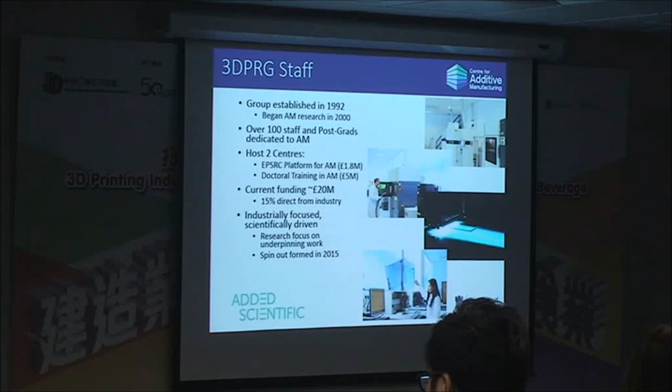So, in terms of who we are, a research group that is around about 100 people, around about 65 PhDs, about 25 postdoctoral researchers, 7 faculty, and some admin and technical staff. And we were established as a rapid prototyping group in 1992 at the University of Nottingham, and then went round various universities in the UK, and ended up back in Nottingham in 2012.

And currently we host two centres of additive manufacturing, which helps underpin our funding. EPSRC is the Engineering and Physical Sciences Research Council in the UK. It's our main science funder for work in universities. And so we host the EPSRC platform grant in additive manufacturing, and I'm also the director of our doctoral training centre in additive manufacturing, where we're training around 70 PhD students in additive manufacturing over a 9-year period, so a large number of students coming through the group.

And we have around about £20 million worth of funding today. About 15 to 20% of that is direct from industry, so we do a lot of direct industry funded research and development. We try to think about research as having a research focus, but it's industrially driven by applications, by understanding what people require from additive manufacturing, and where the science then leads us into good science work.

We also formed a spin-out company in 2015 called Added Scientific, which is a technical service and consultancy company to allow people to understand and to educate themselves and to get the best out of these types of technologies. You can see a few pictures on the right-hand side there of the lab, some of the single material, but also the multi-material systems that we have available.

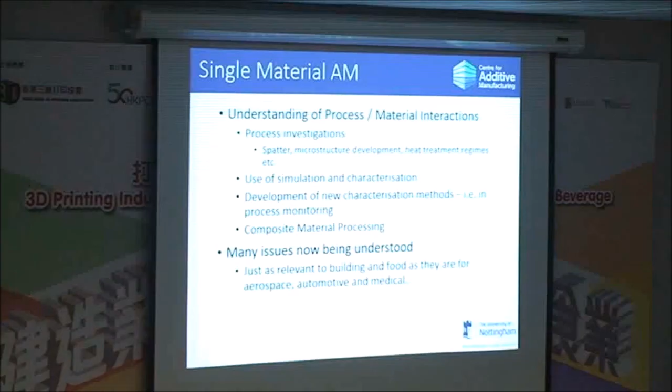So, where we are. Currently, we have a range of technologies that are very useful for fast prototyping, for fast realization of very complex goods and services. We are really at the point where we can pretty much build the geometries that anybody really wants us to be able to do. But there are a lot of secondary factors that are starting to come into play that are really starting to dominate what's happening.

So the example of Boeing using titanium, we heard from Magnus earlier, is a great example, because we've been able to make those structures and make those parts for a long time, for probably about 10 years. But what we haven't been able to do is understand how they differ from those that would be traditionally made. And so a lot of the work that we're seeing at the moment is trying to understand how the processes differ and how the processes affect the components that are coming off those machines.

And so we're seeing a lot of advances in simulation, characterization, microstructural analysis for metals, and composite material processing as well. And we're just starting to uncover a lot of issues that are now starting to be understood. Why microstructure develops, why strength is different, why elongation at break is different.

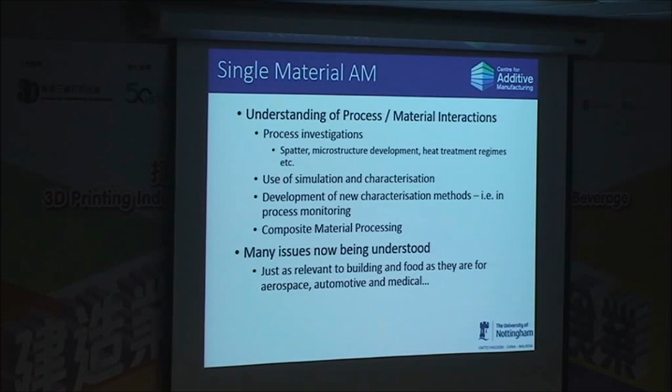And this is just as relevant to the building and food industry, because what goes through the machine is important, but what comes out of the machine is the most important thing. So understanding that material process interaction is critical for the success of any product or any type of application where additive manufacturing or 3D printing is going to be used.

And so what we're able to do now is start to use these tools to understand our processes better, understand what is made, and then reuse that information to make the process better in the final product. So even with the level of porosity you can see, these are 99.9% dense. So they're very dense in comparison to most casting materials that come off conventional processes. But even because of that, because this is a new process with new materials, we're still a little bit nervous about using things that aren't 100% dense, not that we ever get to 100%.

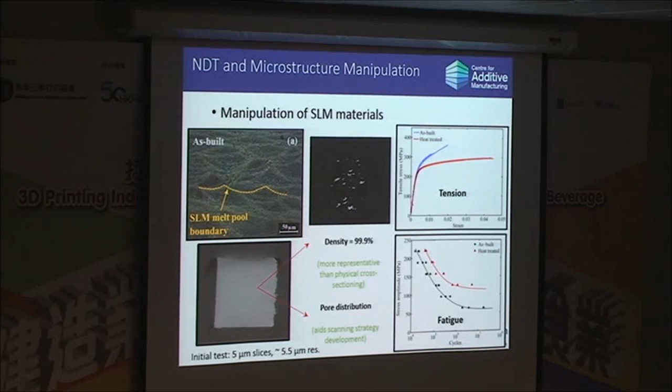One of the reasons for that porosity is that we have different activities going on in the process. And so one of the things that we have when we're processing metals is we have a really nice, very pretty little firework going off as the laser traverses across the bed. So we have this little explosion happening every time we hit the bed with the laser light. But what that means is we create something called laser spatter.

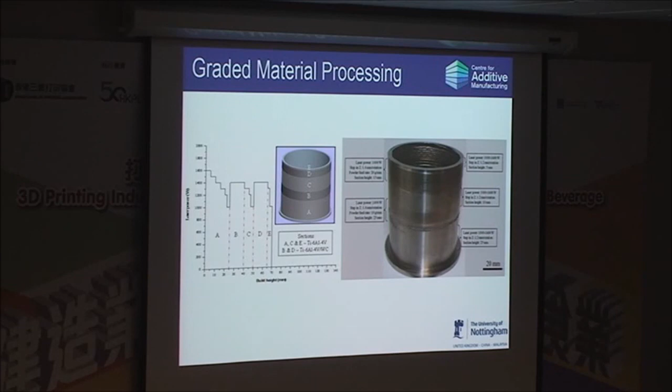And so as I mentioned before, we're starting to develop a lot of methods to look at how components that come off the machines differ to the original design intent, so the original CAD. 3D printing, additive manufacturing is driven by digital data. We need digital data to drive the machines, and if we don't have it, we can't produce anything.

The fact is, though, that digital data is realised in a physical way in the machines. And so what you get out of the machines will be slightly different because of shrinkages, because of thermal stress, because of all sorts of different problems that go on in the machine. It will have a different structure when it comes out of the machine, and understanding that enables us again to go back into the machine, to change what happens in the machine, and to try and make the machine more reliable, more repeatable, and moving further forward, hopefully lower cost because we'll have less waste in the machine.

Another benefit to using additive manufacturing is the fact that we can do something called in-process monitoring. So whereas with almost every other traditional manufacturing technique, you put in your raw material and you get out your final component, you control what goes on in the process. Here, in additive manufacturing, we can see what goes on in the process. Because we build layer by layer, we can take images or we can take optical measurements during the process and really start to understand where things have gone wrong or where things are not quite as they should be in the process.

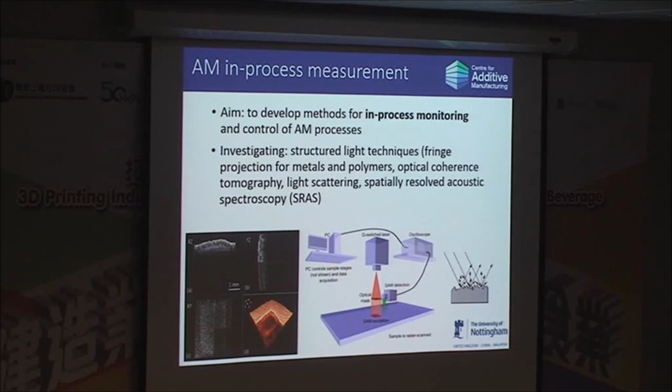So all of this work really leads up to why do we bother with additive manufacturing? Why are we interested in it at all? And we are interested in it at Nottingham because we want to be able to build things like this that are phenomenally complicated, but not complicated for no reason. They're complicated because they're higher performance.

So again, Boeing are doing this because they want lighter weight components on their vehicles or aircraft, and so they use design algorithms such as topology optimization, which is how these have been developed, to really reduce the weight on those components. And additive manufacturing is the only real way of being able to realise the complexity in the component and realise that physically.

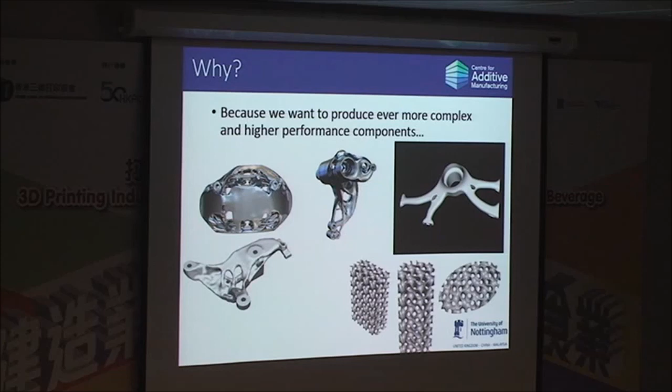Again, you can start to introduce structures that would be impossible to make in a standard manufacturing technique. So these can be used for filtration. I'll talk about these a little bit more later on. Oh, there's more design optimization in the bottom.

So where are we with building and food? So there's been quite a lot of activity in building and food. And these are just some examples. You'll hear a lot better examples, I'm sure, later on. But these are some examples that you can see. This is a metallic structure that is being developed in Holland. It's going to be developed as a bridge over in a park, I believe, and it's a metallic bridge, and this is just a scaled version of that.

All of these processes have the same issues that I was talking about before with the metallic and with the polymer processes that we have for standard additive manufacturing. You need to control the raw material, you need to control the environment that the process is happening in, and you need to ensure the accuracy and repeatability. I don't think any of these really are contentious. For building specifically, atmosphere and the environment are key elements to this.

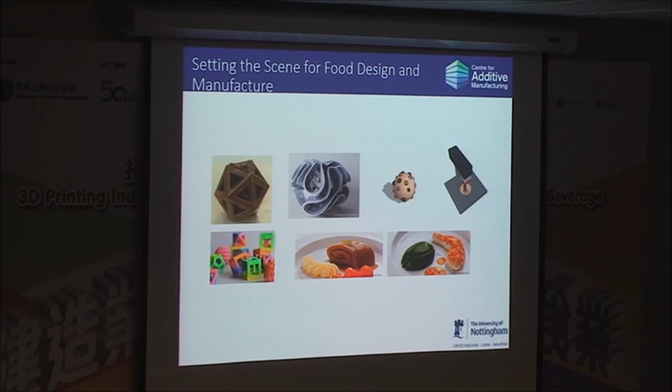In fact, in some ways it gets even worse because we're eating it, so we want to make sure it's not going to do anything badly. Okay, so just to set the scene, these are some examples that I've been able to look at, and most of these examples are based on three manufacturing types.

So these are the seven additive manufacturing categories that are defined by the standards group ASTM F42. So these seven categories are the different types of processes that we have available for additive manufacturing, and most of the food ones, and actually most of the building ones, are actually manufactured using these types of process.

So material extrusion, which is what we commonly know as the consumer 3D printing, powder bed fusion, and the metallic kind of systems, but also sheet lamination, where we're putting a sheet across the bed and then cutting out its shapes and then merging them together, and then actually another one which is binder jetting. We actually do have some work going on binder jetting for food in Nottingham as well, but I'm not going to talk about that today.

So in terms of processes and food specifically, material extrusion is probably the one that dominates the application so far, where we're using a filament of material or a pellet or a paste or a formable liquid to directly squeeze out, like a cake icing type method, to produce our layers in the component, and to then solidify that component together to give us our final shape.

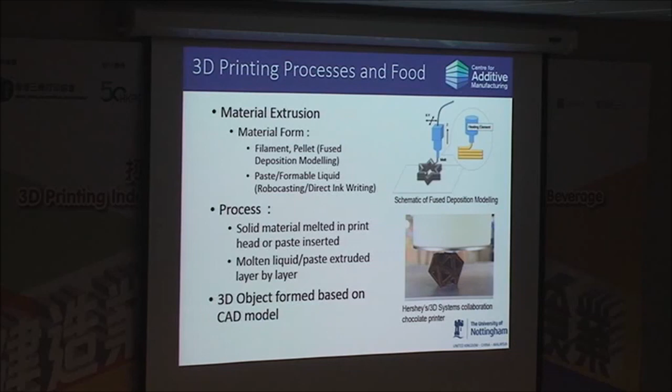One of the things that's really interesting for me in terms of food is normally a foodstuff isn't made from one thing. It's not just chocolate. There'll be some nuts in there, or some caramel, or something tastier, I don't know. Or it might be something that's made from different levels, different types of sugars, or different types of fats, and different types of proteins.

And so here you can see some further examples by Cornell. Again, by using paste-based methods, some gummy sweets, which we'll hear about again later on, but also pasta. Pasta that's been done by a company called Barilla and the research organisation TNO in Holland.

So all of these elements require significant control, significant challenges in being able to put the right material in the right place at the right time to give you the right performance, regardless of whether it's building food, whether it's rocket engines for spacecraft. It's all about controlling where and when the materials are put down.

This is another example. So this is binder jetting. So here what we're doing is we're printing into a powdered material, in this case sugar. So we're printing into sugar different colours, but also with a binder that's edible. So you can produce lots of different shapes and sizes and different designs and all sorts of different things.

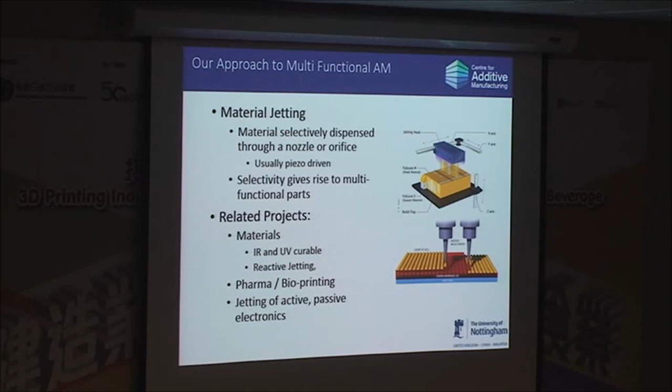So the interesting thing to understand about inkjet printing is most things can't be printed. They're too thick, their viscosity is too high. And so what we have to do is lots of work in the material space to reduce that viscosity down to a point where the material can flow through a head and be ejected from the nozzle.

So here you can see some examples here of wax that's been printed. There's wax that goes into the head, is melted up to its melt point, and the viscosity drops down, and we're able to print out droplets of this. And what we're looking at is lots of materials and chemistry challenges.

Before we get to that stage, we need to be able to design for these structures. So at Nottingham, we've also been developing the design side as well as the process and materials side. And these very complicated structures that you can see below, we can quite easily produce using some design software that we are developing as part of an Innovate UK funded project.

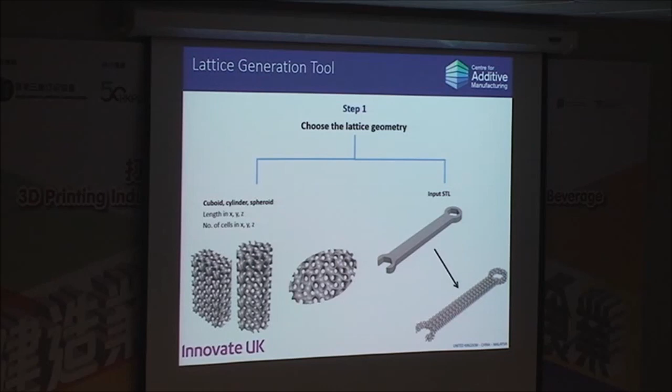Where we can choose from a range of different cell types. So from this double gyroid all the way down to, no idea what this is, lidinoid or whatever it is. But these are all something called triply periodic minimal surface structures. So again, that's the one for the test later.

These structures are surfaces that interweave, and they're very interesting because they can separate space, they can have very low volume, but also you can run different fluids through different elements of it, all sorts of different things. And our software basically enables you to choose one of these, or two of these, or three of these, and populate your design space with them pretty easily.

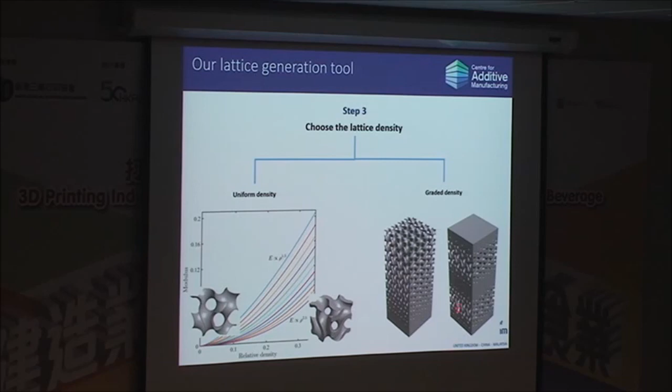And so here you can see changing density to change the modulus, to change the mechanical properties, but also we can grade that density through a component from fully solid to a given density measure. Or we can do that in a varied kind of way, so we can do this in a sinusoidal way as well.

A different way of going about this design is to understand what the competing design constraints are that you have in your product. So for this example, this is a structural analysis that's lightweighting a component, but it also has an electrical conduit which has a minimum distance profile embedded in it. And so what it's trying to do is compete with the lowest lightweight structure for the structural, but also the shortest distance for this electrical conduit that's in there as well.

And so we have this system again at Nottingham where we're able to do multiple objective optimization to really start to expand the design space for any kind of application. It may be that you don't want electronics to be optimized, but you maybe want thermal analysis to be optimized, or it might be placement of different materials to give a different flavor profile through an optimized component, or an optimized product rather.

And you end up with things that look like this. So this is something that our students designed about 4 years ago, where you can see that the dark elements are the electronics and the see-through are the structural. And this is the kind of thing that we'd like to be able to produce, but we just can't. This is printed in basically black and clear plastic at the moment. So if these were electronics, then we'd be really happy, but they're not. So that's what I'm moving into now.

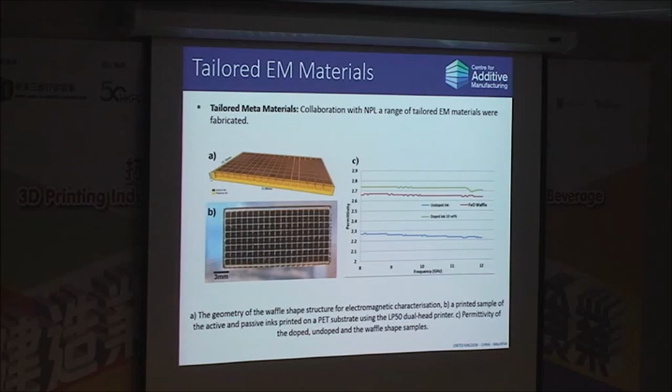So with this inkjet printing type method, we're able to print a wide range of different materials, and so what we can start to do is tailor how these materials are delivered to the component. Here you can see this waffle structure, we call it a waffle structure, which has a structural material, and then the black areas are silver. And you might ask why you want to do this.

Well, this is actually a very useful method of tailoring the electromagnetic properties of a component. So this is using this kind of technique to change the relative permittivity of the component, which is really interesting in terms of metamaterials, for antenna, for electronic screening and shielding. You can do all sorts of different applications with this kind of technology.

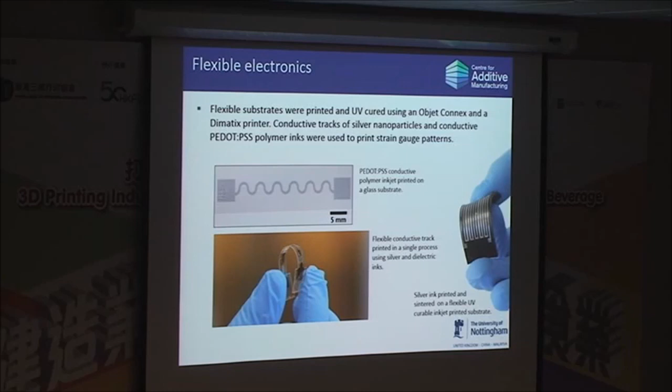You can also start to build sensors into your components. So this is an electroactive polymer printed into another polymer, and then silver printed into another polymer that's flexible. So you can start building flexible sensors that might be required for structural monitoring of your components, or structural monitoring of your buildings, or something like that. That you can then print into structures as you're going through, or add them on later, because they're the right shape, the right conformity to the particular pattern that you're interested in.

And this example just really shows you how we move from 2 dimensions. Printing electronics in 2 dimensions is actually quite simple, relatively. The materials are not necessarily the greatest performance, but it's quite simple to do. And so you're able to print these 2-dimensional structures and then add in components like batteries and switches and LEDs. But what we really want to be able to do is print in this 3rd dimension. And that's much more difficult.

But printing in this vertical direction is much more difficult. So we've spent about 3 years being able to build up with metals in a printing type system. And here you can see about 5,000 layers of silver in the vertical direction, which is able to take a current. And actually we now have different ways of printing these so that it takes less time. This would have taken overnight to print that high, which is only about 3 millimeters, so it takes a long time. But we're now able to do this a lot faster than we were before.

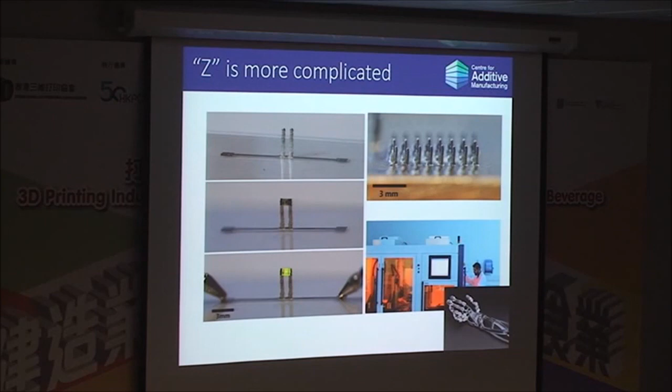And we're also able to change how the microstructure of the material really develops by doing in-process methods that enable us to get to this nice continuous structure. Obviously this is really bad for electronics because the electrons won't go in that vertical direction, they get stuck at the boundaries.

Taking that further forward, what we can do is start to build transistors. So we've seen quite simple circuits, but now we're moving towards being able to print transistors that then have the effect of being able to print switches within a circuit. And so we're moving towards being able to print these transistors into a component, and so then you can effectively have logic gates and hopefully one day a printed sort of microchip design. And you can spatially move those components throughout the system to understand where you need them, where you don't need them, and get the right, more optimum design.

Finally, in this kind of electronics area, what we're able to do is print the circuits, we can print some of the components, so we can print batteries, we can print resistors really easily, we can print transistors relatively easily, but what we're also able to do now is print light.

So that's taken 5-6 years to get to that point in terms of research. But obviously, working in the university, we try and do as many different things as we can. And so this is just an interesting sideline to the electroactive printing that we're interested in being able to do.

So instead of those inks that you saw that took overnight to print a few millimeters in height, they're made from a nanoparticle suspension in a material. What we'd really like to be able to do is actually just print the metal. And we can do that with powder bed systems. If you want to be able to print multiple materials, they don't work, because you can't spatially print in different materials very easily. So we have a process at Nottingham called MetalJet.

And basically this is the same kind of process as inkjet printing, but we're actually printing metal direct from melt. And so we have a collaboration with Canon Océ where we're printing three-dimensional structures using a print head that runs at around about 1800 degrees C to deposit metals directly.

And here you can see, one day, maybe, try it again in a second. You can see in this video, if it works, oh, there we go.

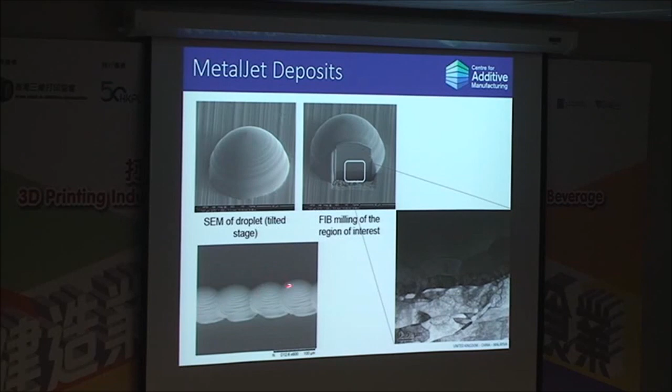Another area which is actually very close to the food area is, because we're wanting to print different materials next to each other, why don't we look at printing, rather than electroactive materials, biological structures and pharmaceutical structures? So one of the reasons why we do this is for drug delivery. And we have some projects that are ongoing that are looking at printing basically tablets. But not tablets of ibuprofen or paracetamol that you would normally buy in the chemist or the pharmacist.

Actually being able to print very high value drugs that have customized elements to them for the individual patient. So rather than giving everybody the same dose via the same pill, you're able to change the dose for each individual patient, but only really for very high value drugs like cancer drugs, HIV and things like that. It limits the cost of those tablets, but also increases how effective they are for the individual patients.

So just going even further down the resolution scale, this is some... I'll sort this out. There we go. So this is some work we're doing with nanoscale additive manufacturing. So really pushing the envelope in terms of the smallest thing we can manufacture.

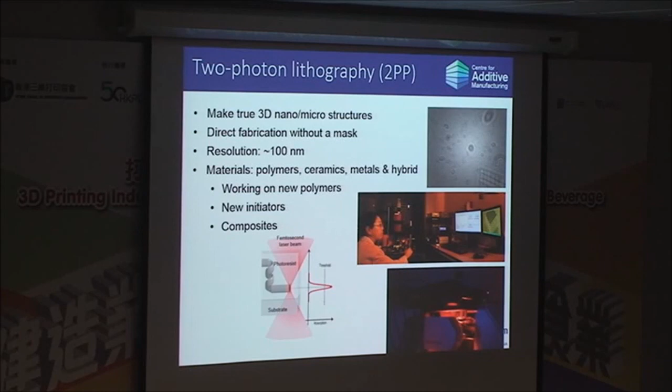Instead of using UV, it uses infrared light to develop the structures. And here are some structures you can see that are printed on that system. So if you look at the scale bar, these are around about a micron in size. So these grids and structures that we can print are really interesting, particularly if you can start to fill in these gaps with something else. So you can start to add in different materials by adding in different coatings to be able to produce really different types of products and structures.

The problem with this process is that you can't build very big things. You can be kind of that big, so a few millimeters in size. But it is relatively scalable. There is a scalability potential with it. And also, we don't have to just build one component, one material component. We can do multiple material components.

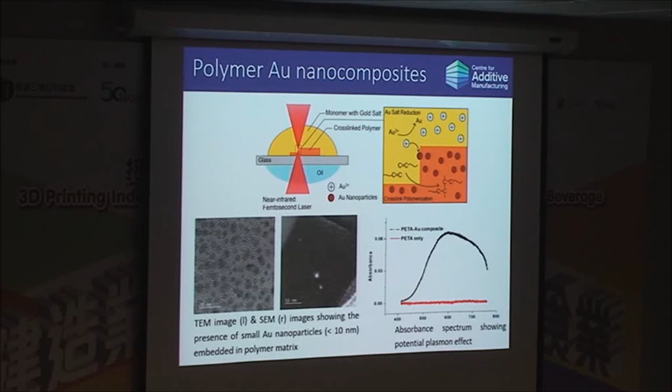So we can start to print metallic components into these nanoscale structures that really give us different metamaterial type properties. And these are polymer structures that have gold embedded in them. So these can act as sensors and act as different biological structures that we can use for scaffolds and all sorts of different things.

So lastly, in terms of the 2-photon, this is again pretty much bespoke to Nottingham: we have this 2-photon lithography method, but we also have something called a set of optical tweezers. So optical tweezers are like Star Trek tractor beams, but only on a very small scale. So they don't pull in spaceships; they pull in little balls of whatever material it is. So this optical trap picks up this individual particle and can move it in 3 dimensions with light. So that's how it works.

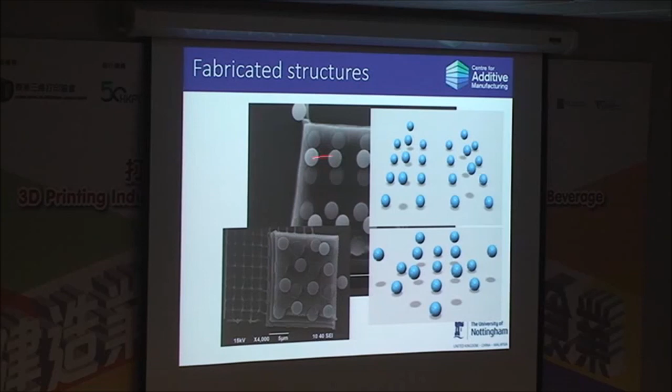And what we've done is been able to couple that with our 2-photon lithography system to glue it in place. So we can start to glue in different particles of different materials into one place and start to be able to make these really complex structures with these additional elements in them. This may work, this may not. Give it a try. Yeah, there we go.

So the blue dots are actually the dots that we've pulled in with our optical tweezers, and then there we go. Excuse me. And then we've set them in place with the 2-photon. So what we're really starting to do is build from almost a nanometer scale, build materials up so that they have particular types of properties, or particular types of process characteristics.

So just to start to summarise, how do all of these previous methods really affect building and food applications? Well, all buildings are inherently multifunctional. This is an example of homeostasis for intelligent buildings. And what hopefully you've been able to see is all of these different methods, whether they be single material or multi-material, can start to be incorporated at different length scales.

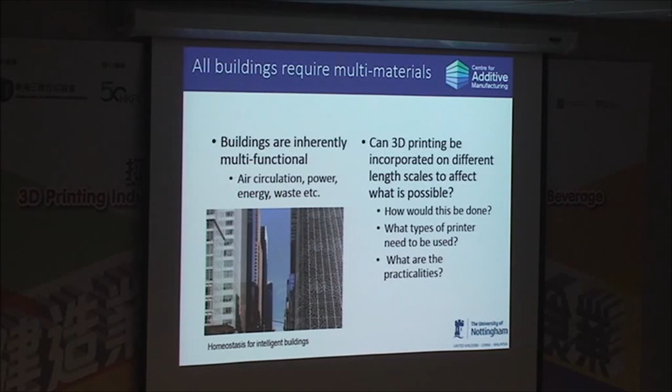But what we don't really understand, and maybe understand later after today, is how these can be really implemented into the system, particularly with buildings, because you have such huge scales in comparison to additive manufacturing processes today. What are the real practical challenges of being able to do this in terms of getting those multifunctional, multi-material structures in there? And the same with food.

We have multiple ingredients, we have multiple components that have to be incorporated in the right way, with the right process conditions to make the material as functional, i.e. have the right taste or right structure or the right feel, as possible. We have the potential to distribute taste, we have the potential to distribute things like folic acid for fortification, or even something called nutraceuticals, where we're actually able to print clinical benefits into food for people who are maybe elderly or for pediatric medicine, to make it more palatable to take that type of medicine.

So really, in terms of summary and conclusions, there's a lot of different opportunities for materials development, for materials qualification. There's a lot of understanding now being developed to be able to start the material process design and to manipulate material response for a given application. We are now starting to see lots of material-specific research becoming more common, and new methods of depositing materials are really quite key to developing that multifunctional side of things.

The multifunctional, multi-material distribution type processes are much more challenging than the single material, because we have to look at how the materials sit together, how they react, how they merge, and really what are the different methods of depositing, different methods of post-processing and consolidating those materials. Really, really important. And really the opportunity is to understand what happens at the interface of the different applications, but also what happens at the interface of the different materials that are being printed together.

My last question. You mentioned a special material at 1800 degrees. In that environment, everything will be melted around the printer head, so you can't use plastic or copper wire. Yeah. So we're looking into printing onto ceramic-filled plastics and ceramic materials as a dielectric layer, but also using polyimide as a print base. Another issue, as well as temperature, is adhesion to the surface, whether we get adhesion at those temperatures, and how much degradation happens.

Hello, Chris. A similar question: may I know the lifespan of the nozzle jet? On our large format printer, I think we're running at 2 years at the moment. But again, we keep the same material. You can flush the heads, and you can repair them a little as well. They don't tend to go down very quickly unless we're doing something very aggressive in the head.

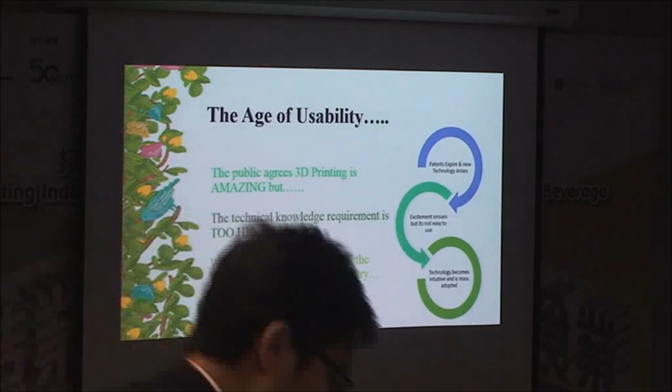the consumer. And that is the challenge right now with 3D printing, unless you have a degree in it, or CAD design, or a massive level of enthusiasm, which there are those people, but they're not the mainstream market. So whoever takes this problem on across all different kinds of 3D printing, food, FDM, PLA printing, home use, creating tools at home, whoever makes it easy for the design and printing process to be perfect every time, and whoever can speed it up to increase usability, they will own that part of the sector and industry for the future, in my opinion.

So how was Magic born? That's Mr. Facine, that's me, and that's Mr. Adine. These are my development team. Mr. Adine helped us develop our ingredients. I came up with the software and the hardware, and Mr. Facine has a huge amount of industry expertise in confectionery, and he was helpful with that. So basically, what did I do? I developed the first prototype printer.

I actually used a shell of a glue deposition machine, if you can believe this, that was being used to apply glue for cars, like double mixture, high intensity epoxy glue. So I used a shell of that, implemented a special extruder base, and launched this into the market in Berlin in the summer of 2015 in order to test, what is the consumer reaction? Are people ready for 3D printed food? Are they going to be freaked out by it? Is it too scientific? How can we make it so that it's really enjoyable and really well accepted by them?

So I moved to Berlin, and I actually worked as a retail associate or a shop worker in this store for 3 months, and I watched the faces of every consumer. I watched the way that they reacted to every single different thing that we tried during that 3-month period, and I learned a ton. The first prototype that I developed was slow, it was still faster than Hershey's, but it's a lot slower than we have now. It took about 10 minutes to make one design. Our candies now print in under 5 minutes, no matter what you design, so it is one of the fastest in the world. But watching people, it made it very clear that 10 minutes in a busy retail environment was too slow. But more than that, the biggest issue that we had was the usability.

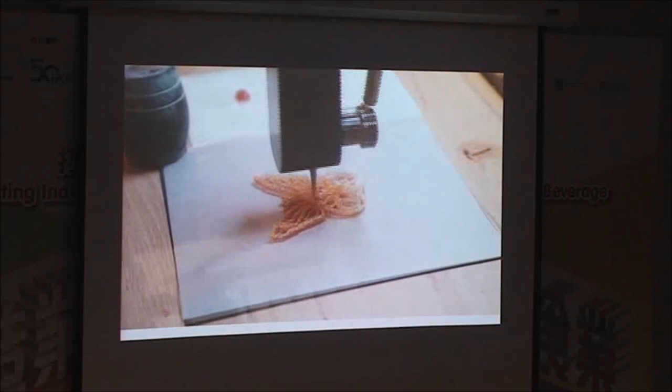That, along with the fact that all products from the Magic Candy Factory are vegan, dairy-free, gluten-free, and all natural, means that everyone from all walks of life can enjoy the experience we have here. Okay. It goes on to show you a little bit more, but it's not that important.

So yeah, you will have seen in that video, the machine was huge. Did you see it? The thing covered in wood? We coated our printer in wood to make it seem more natural as opposed to being like food made in a lab. And that actually has been really well received by the customer. So our printers still are focused around the idea of natural magic as opposed to high-level science.

And this is not super easy to do, and this is one of the big problems with food printing. People who are using 3D food printers in a lab or at expos don't have to abide by any of those rules, so they can create really cool looking stuff, but whether they'd be able to actually sell it to someone in an actual retail environment is a different story altogether. Powder bed printing has a lot of problems with chemical transference, etc., which make it very difficult to pass. So that's the first step.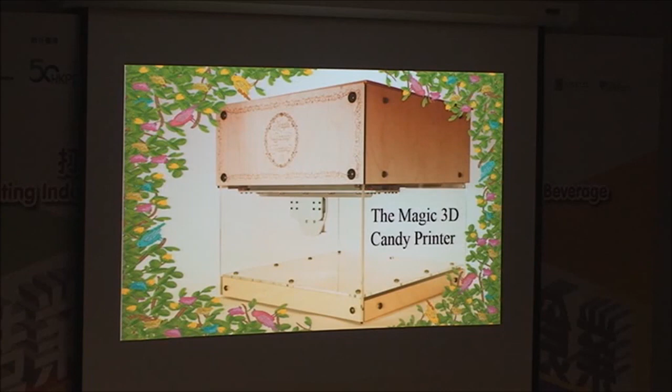They type in their design, they draw their picture, they press a button, and like magic, the candy prints out in 5 minutes. Now, we all know there's a ton of science and technology happening in the background, but the consumer doesn't really care about that. All they care about is, this is a magical device that allows me to make something special and unique for me every time.

And then these are Gummy Zummies, because the word cartridge is not a food word, and we do not say cartridge in food. Or syringe, that's even worse. So we have a trademark name, Gummy Zummy, and inside of these cartridges, these are pre-filled. They each have their own nozzle. They're made of totally recyclable PET plastic, and they come fully wrapped and ready to go.

You place one in the machine for each individual print. You push one button, it prints it out, you take it out, you recycle it, ta-da. And that works perfectly every time. And by controlling the material, the amount, the heating, and the actual plastic that we use, which encourages very fast homogeneous heating, we're able to ensure that the result for the customer is perfect every time.

And then we have finishing sprays. This is more retail magic than it has anything to do with 3D printing, but every candy can become fizzy strawberry, sour strawberry, or glitter strawberry, etc. And you'll see those over there when you're done. All of the products that we make are completely safe for almost anyone to eat. They're GMO free, they're vegan, they're free from gluten, dairy, soy, eggs, peanuts, tree nuts, caseins, and wheat. And they're halal and kosher friendly.

And that means that it's really, I believe, the future of food to be able to create things that are inclusive, not exclusive. And by traveling around the world and seeing all of the different trends in different types of food allergies, and even though maybe people are not allergic to it, it's a trend to be gluten-free, for whatever reason, it doesn't really matter. The consumer decides what we make, and now we don't actually exclude anyone from our product set, which I think is the future of food in general, or should be.

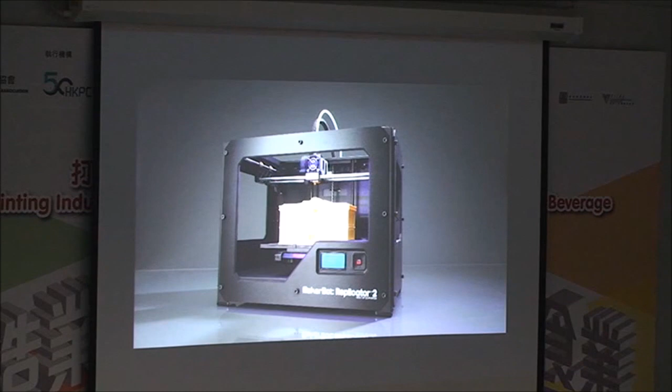I'm going to talk about our innovations which consider 3D printing architecture for the 21st century. We have several ethos, one being that we often look at traditional construction practices as the way to move forward, particularly looking at smaller building components. So rather than thinking of one large machine that prints one material as a solution for architecture, we believe that architecture is comprised of many different kinds of materials: hard materials, soft materials, woods, cements.

We also believe that building materials should come from sustainable and renewable resources, or should use building materials in sustainable ways. So I'm going to talk to you about some of those as well. As I mentioned, we began with the most common building element, the brick. And we've explored the way that very accessible technologies can allow for scaling up in terms of architecture. And we've begun to explore several experiments that look at ways that additive manufacturing can enter the building industry.

So we begin with a single brick. How can we introduce complexity and craft into a system to create 3D printed walls, for example? Walls that use one single brick that can be rotated randomly and be assembled very simply, entirely with 3D printable components, and create a complexity that uses the material, the materialities, translucency, various colors to produce customizable architecture.

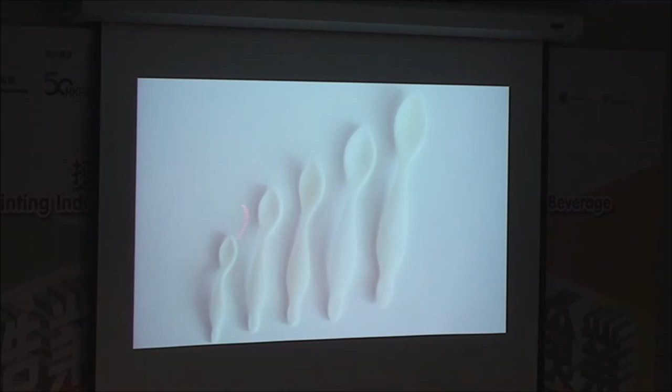The 3D printed spoons you see are teaspoons. And so we make teaspoons out of sugar that are the volume of a teaspoon, half a teaspoon, a quarter teaspoon, a teaspoon and a half. And so these are our sugar teaspoons. But it doesn't make sense to print teaspoons out of sugar, so we printed teaspoons out of tea. These are our 3D printed teaspoons that are printed out of tea that are the volume of a teaspoon.

And of course, if we have teaspoons, we also need teacups. These are our material innovations that explore tea as an additive manufacturing material to make 3D printed teacups. And if you have teaspoons and you have teacups, then of course you'll have a tea set and you need a teapot. And so we decided to 3D print a teapot as well, but what teapot did we choose? I don't know if you're familiar with this teapot, but this is called the Newell teapot. And this was the first object that ever was translated and rendered on a computer back at the University of Utah.

And so the Newell teapot was taken into the computer many decades ago, and now we've brought that back into the physical world. This is the Newell teapot, 3D printed out of tea. And of course, this is what we call the Newell tea set.

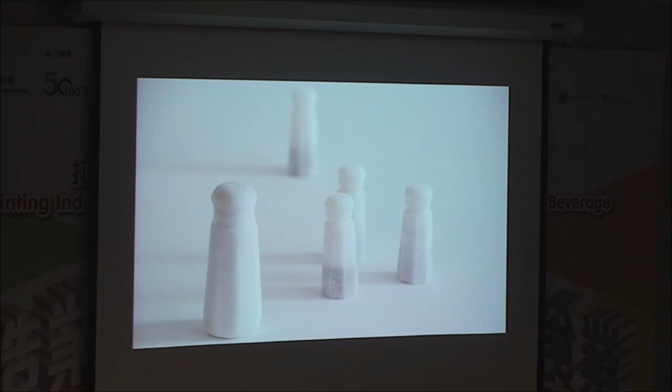Looking around the table even more, we were interested in the salt as a potentially additively manufactured material. So we 3D printed some salt shakers, but that in fact wasn't very exciting or very useful. But we were much more excited about the idea that in the San Francisco Bay Area, there are several hundreds, thousands of tons of salt produced each year in these crystallization ponds, which makes salt a very available and local material, makes it very inexpensive, and only wind and sun is used to produce the salt.

So if you ever fly into San Francisco, you'll see these beautiful ponds that are multicolored, often pink, and those are the crystallization ponds where they bring in water from the San Francisco Bay, and they lock it in, and they let it dry over the course of the year, and it produces about 4 inches of salt each year.

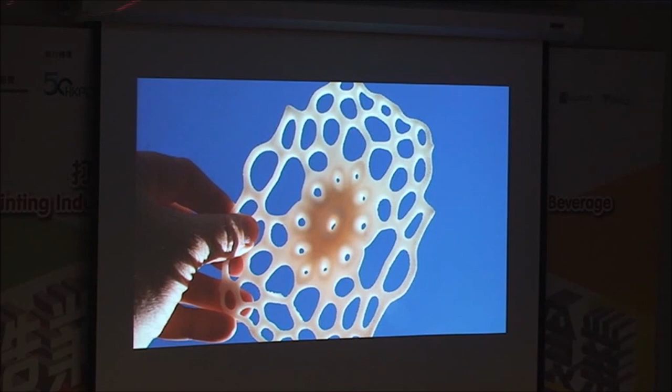So we began to explore how salt can become a material for additive manufacturing, and these are some of our experiments looking at micronized salt from that landscape as a building material that can be assembled into components. We developed a polymer that can seal the salt, making it waterproof and giving it structural qualities. So we began to aggregate salt into components to think about how we might produce larger structures made out of 3D printed salt.

The company that owns the land in the San Francisco Bay has been slowly selling the land to produce housing, and they're currently planning on constructing over 40,000 houses in this landscape. So as a theoretical and conceptual exercise, we wondered, well, could salt be part of the building palette that would produce that architecture? So we took it upon ourselves to produce an experiment that explored salt as a building material.

We were inspired by the Inuit igloo because the Inuit igloo uses the material from the landscape to build the architecture itself. And so we made a Saltygloo because it was made out of salt and glue. And if you're a Spanish speaker, you know that y means and. Thanks.

So we began to design the Saltygloo looking at the forms of the traditional salt extraction practices and also the microscopic crystallization forms of salt. And this is a single brick. So whereas the Star Lounge was an experiment really in file management, this became an experiment not only in materiality, but how we could produce a structure very quickly. Fundamentally, a lightweight salt tent.

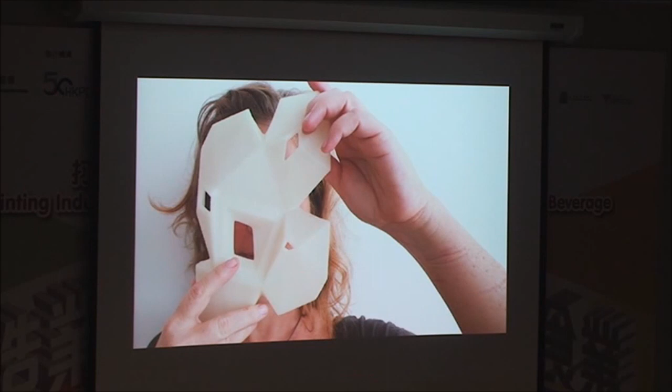And so we took this form and we aggregated along the surface. Here are the salt components. Each one of the 340 salt blocks are unique. And here they are assembled together to create a lightweight shell. The shell is structural, but it's also assisted by very lightweight rods held in tension. So it's really like a salt tent.

And here is the salt igloo in our lab being constructed. Here's the interior of the Saltygloo. You can see they're held together with these lightweight rods and very small clips, so it can be rapidly deployed, so it can be assembled and disassembled very quickly. And here's another view of it.

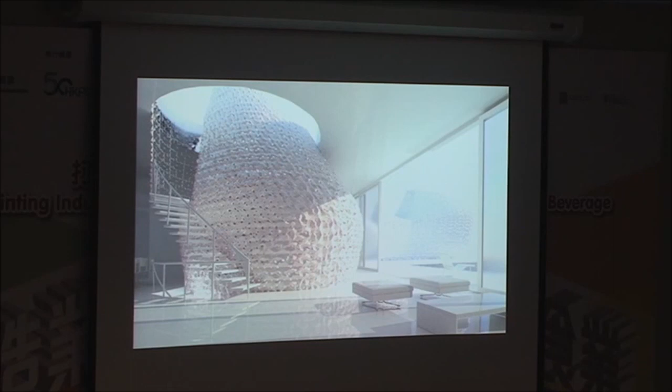This was a prototype that was funded by a company in Beijing who wanted to create 3D printed houses north of Beijing. So we're imagining these as prototypes for architecture. We're imagining these, in this case for this house in Beijing, as ways to enclose the interior private elements of the house, bedrooms and bathrooms, for example. But because we also have been able to create these as waterproof structures, we're imagining exterior components as well being clad, so building facades, for example.

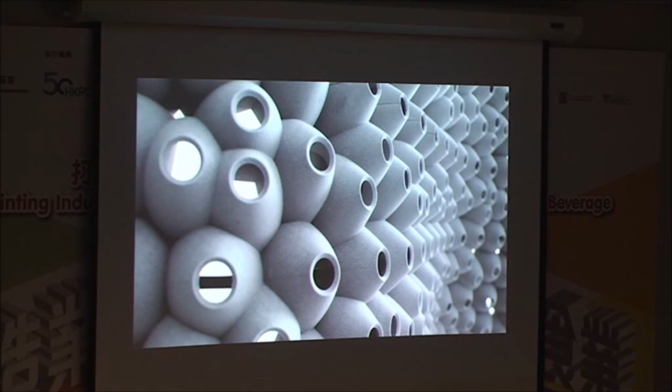And we've explored other materials in the house, particularly for the facade, that begin to take the advantages of 3D printing to define views, to allow light into spaces in particular ways, and to define privacy using a material that we've been exploring for additive manufacturing, which is sand. Sand, of course, is readily available, and it can uniquely be used as an additively manufactured material. So we developed a series of blocks that could be stacked and hung as a building facade. They too are waterproof and have structural qualities, and this is what we call the Picoroco block.

It'll also be used for sound attenuation, and because it's quite dense and quite massive, it's very much like stone. And so in another project, we began to explore how this material could potentially be used as a structural material. And being inspired by Inca ashlar masonry, how could we create a series of interlocking blocks that worked to resist seismic forces? And this is a project that we call the quake column.

So you may be familiar with Inca ashlar masonry, which is very complexly cut to interlock together, and when there's an earthquake, it has the ability to disperse the seismic waves. And so we decided to take that into consideration to make a 3D printed block that could interlock very tightly with its neighbors, and that could be assembled very easily because instructions could be encoded in each block. And also it was very manageable because although each of these blocks are quite heavy, they had a handle 3D printed into the block itself, making them easy to carry.

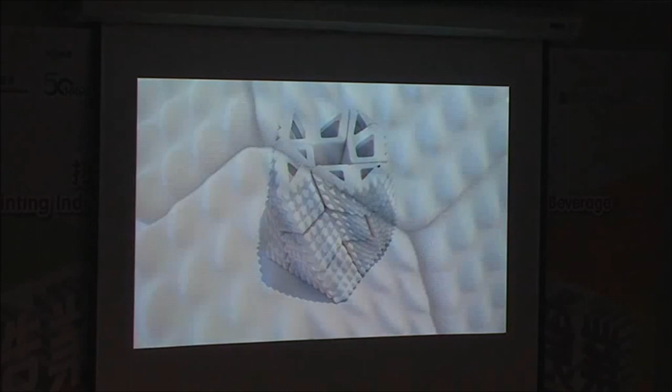So here you see the precision of each block as it's interlocked with their neighbor. Here's the assembly, you see the instructions, so a workman knows exactly where they go in space. And this is the 3D printed quake column.

Other materials that we've explored and developed for 3D printing are clay. And how could we take humankind's oldest additive manufacturing technology and apply it to the 21st century? So we began to develop clay as a 3D printable material and to begin to think of applications for this material. Some of our early explorations simply explored precision and accuracy and how we can make very thin structures. We didn't know what exactly we were going to make, but we also began to fire them as ceramics and test them with glazes so we could see what the limitations of this material are.

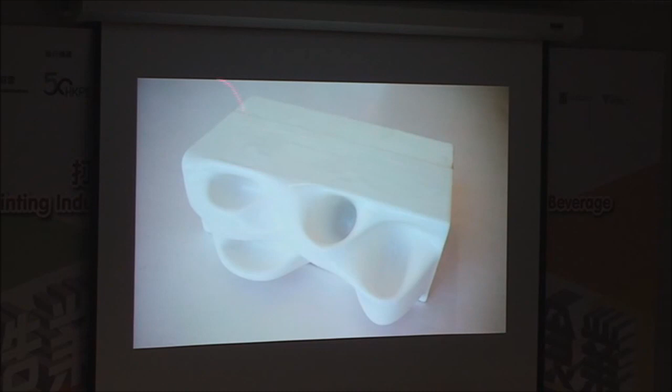And we also began to imagine how we could introduce this into standardized building components and systems. For example, taking the simple module of a brick, could we have 3D printed bricks that could plug into existing brick structural networks, maybe bricks that could hold plants or water or vegetation? Could we make a 3D printed brick that was full of air pockets, and maybe that held a thermal barrier between the exterior and the interior?

And in this case, looking back at traditional architecture, we're exploring this technology that uses a very porous clay pot that holds water and is suspended in front of a window. This is a technology that's used in Africa and the Middle East and in the arid regions of the Mediterranean. And what happens is, when breezes pass by that pot, it causes the water to evaporate. And in an arid climate, when the humidity increases within a space, the temperature drops, and therefore this is a passive cooling system.

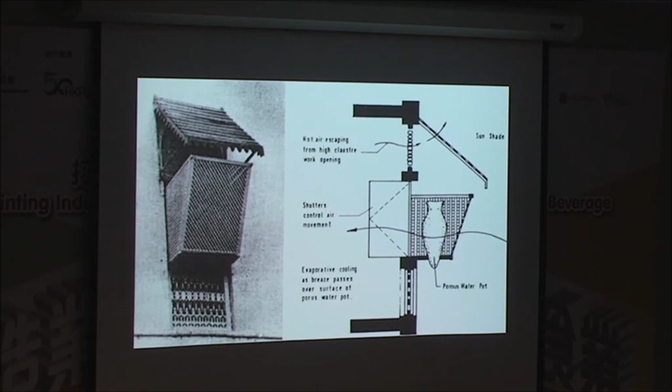So we developed a 3D printed brick that could take advantage of what 3D printing can do, which was to create two levels of porosity. In this case, a microporosity that through capillary action absorbed water like a sponge and held the water within the brick itself. And another level of porosity that allowed breezes to pass through it and guided warm, dry air through the brick and brought cool, moist air into the building. And so we call this brick the cool brick.

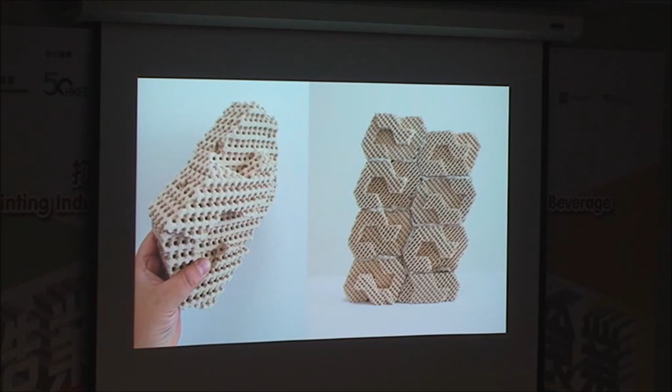The cool brick also has the advantage of being able to be attached with mortar quite simply because the mesh of the geometry allows it to be held together very simply. And this relief that you see allows the surface of the brick to be in shade most of the day, so you don't have evaporation due to the sun.

Other materials that we've explored are paper. We've been able to take recycled newsprint and turn it into a powder and create a 3D printable material from that. But more exciting to us is to take the over 7 million tons of wood that are wasted each year in the United States and turn that into a 3D printable material, essentially taking what has been a subtractive industry, beginning with a tree, chopping the tree down, chopping it into smaller pieces with an enormous amount of waste, and converting that into a productive and additive material strategy for useful building components.

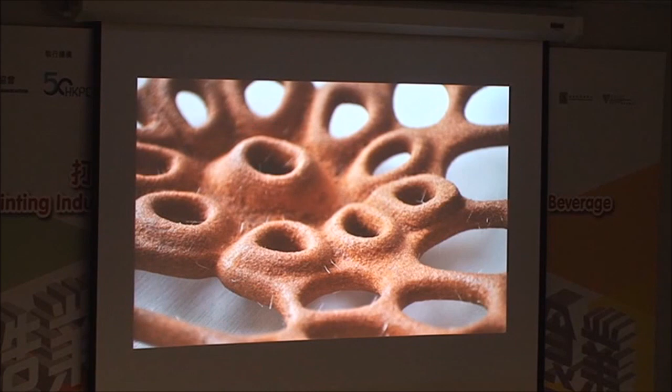And so these are experiments in 3D printed wood with the material we developed. 3D printed wood has interesting characteristics. It is waterproof and it has structural capacity that is stronger than wood itself, both in compression, and we've introduced a fiber reinforcement system that makes it very strong in tension as well. And what's interesting is that the wood begins to look like wood.

The additive manufacturing layers create a kind of artificial grain that would be found in old growth woods. These are not growth rings, these are in fact the layers of additive manufacturing, layer by layer of the wood itself. Some people say that it also looks like rusted corrugated metal or Corten metal.

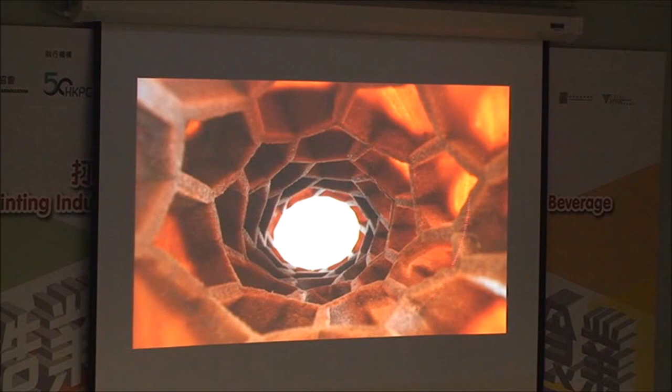It can have translucent properties, and we've tested various kinds of woods, softwoods, hardwoods, and we're always thinking about how the components can be aggregated, that we're making building blocks to create larger structures. So we begin with the tile, we think about some level of aggregation, and we begin to envision wood structures that can be used for interior partitions, walls, or exterior facades that have a high degree of detail and a high degree of craft and beauty.

Taking into account our knowledge with paper and wood, we begin to explore other waste materials that are found locally in California. There's an enormous wine industry in Northern California, and much of the waste that's produced in the wine industry is grape skins and grape seeds. And they've attempted to do many things with these materials, feed them to animals and use them as fertilizer, and even feed them to people. And so they packaged them very nicely in little bags and tried to sell them with little recipes of how to cook cookies with them and things like that, but nobody was buying them.

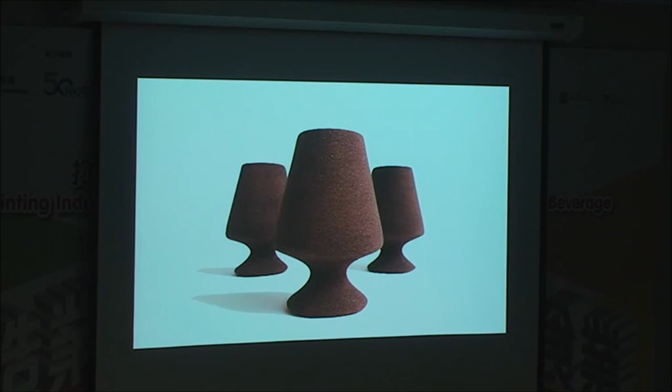So we began to explore how we can take this grape pomace and turn it into a 3D printable material. So these are 3D printed wine goblets made out of Chardonnay skins, a waste product of the wine country in California. And for Design Miami, we also produced this wine bucket made out of the Chardonnay skin, so that's a 3D printed wine bucket.

Another material that we've been exploring recently is rubber. And the rubber we use is made from waste car tires. And in the United States, there's about 300 million car tires that are thrown away each year. It occurs to me that 80% of those tires are in fact recycled in the United States. But that's not the case everywhere. And in fact, in Kuwait, 0% of tires are recycled each year. And this is the largest tire landfill in the world, found in Kuwait, and it can be seen from space.

So can we take waste tires and convert it into a useful material through 3D printing? So we began to explore that, partnering with a company that can micronize the rubber by freezing it with liquid nitrogen and breaking it into a powder. The material then comes into our labs, and we introduce our knowledge base to make it into a 3D printable material. And so these are some of our experiments converting tires into objects that have a degree of complexity and potentially usefulness.

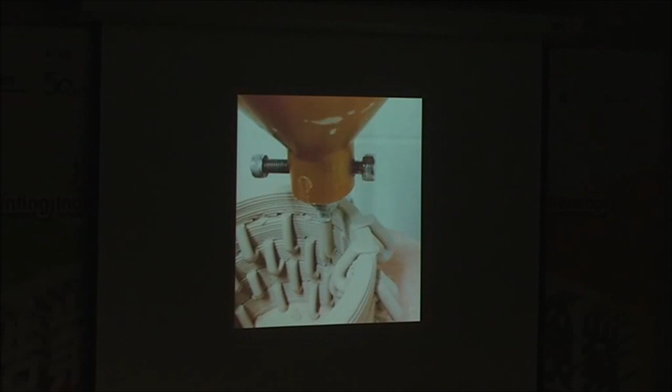More recently, we begin to return to clay as a building material. And we like clay for a number of reasons. We like it because it's very natural and earth-friendly. It's non-toxic. It lasts for 30,000 years as long as we know. And how could we use this in different ways? The material that we developed before was a powder-based clay, and we could produce very complex objects. But what we've been doing more recently is not thinking about the material or the object, but we begin to explore the way that the machine actually works. And let's see if I have a video here.

I don't know why it's playing. Suddenly my computer froze. Let's see what happens.

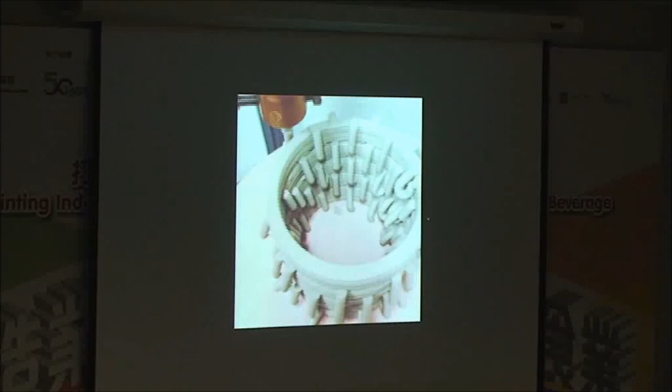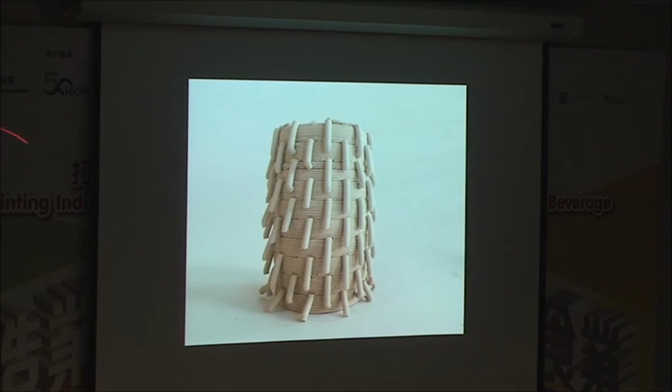There we go. So again, much of our work has been in the realm of material design and also object design. And so in this case, we're no longer thinking about the design of the objects, but the function of the machine and how the machine contributes to the making of the object. So we're making strange objects, and we don't know where this is going to go, but we're making objects that look like this, hairy objects. We're making objects that look like this, kind of curly objects.

But to us, this is exciting because it opens up new possibilities for the making of ceramic objects that we may find have unique aesthetic qualities, functional qualities, structural qualities. I mean, in some ways, this is art, but in other ways, this is science. This is interesting to us, and we want to see where this research takes us. So these are objects made out of ceramic that then we can fire and glaze. They become waterproof and non-porous.

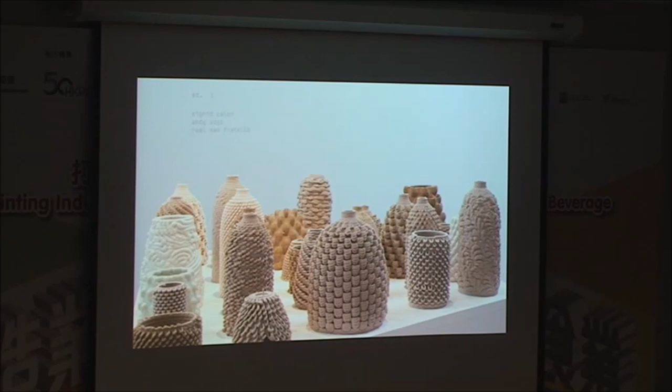And so this is a body of research that we created that's called G-Code Clay. And G-Code Clay explores the machine behavior, creating a series of ceramic objects that sort of defy what we think ceramic can do, but also some of the fundamental preconceptions of what 3D printing ceramic objects can do. Mostly we're struck with the kind of layering of 3D printed objects through extruded clay, but in this case, we can make clay that looks much more like textiles and woven.

And you see in the background, we're also exploring the way that these can translate and scale up. And we're pushing these to particular limits, thinking about texture and surface and pattern that, again, may have unique structural qualities, may have performative qualities, but also aesthetic qualities.

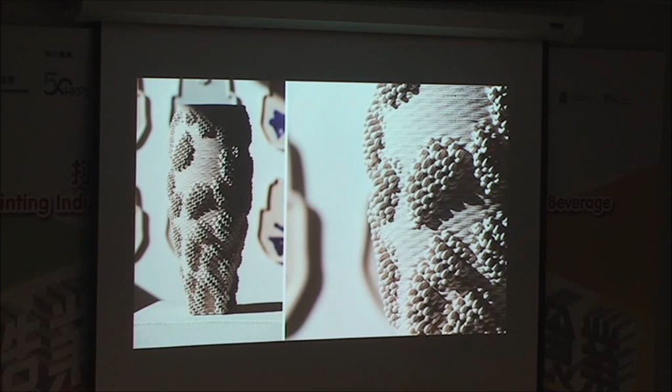These are some of our experiments in thinking about how these can be used as a wall cladding system, for example. This could be used on the interior or the exterior. In some cases, the entire structural system and hanging system is 3D printed and customizable. And you can see the unique textures that these produce. These are textures that would be impossible to be made any other way.

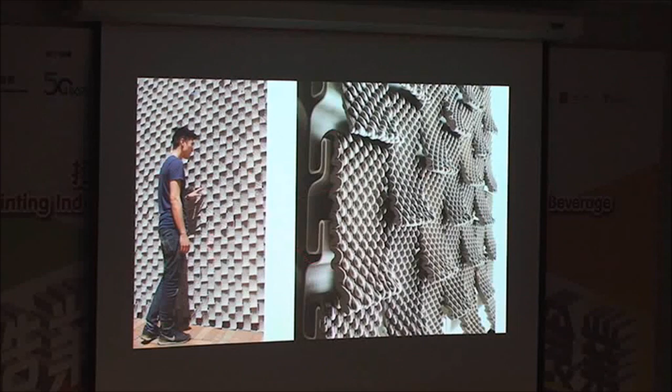And so more recently, we're beginning to 3D print a micro house. And this will be finished in just a couple of months. But the exterior of this micro house looks like this. It's entirely made out of these 3D printed ceramic rain screen hung on a 3D printed surface that's translucent. The interior of the house is the 3D printed bioplastics and corn. And even the furniture inside is 3D printed as well.

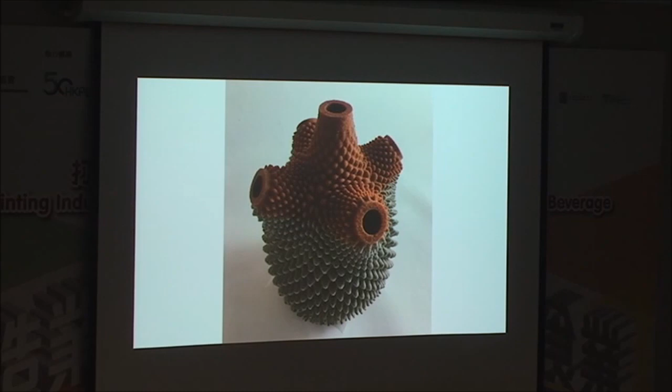And we began to push this even further. So don't ask me why we did this, but this is curry at the top and Portland cement at the bottom. And you can see really how beautiful that is.

Other materials we began to explore in the same way through gradients are ceramics as well. And so at the top is a porcelain, and at the bottom is a high fire clay. The top is translucent, the bottom is opaque, and these are a series of objects that we call bad hombres. And these bad hombres mix materials in different ways through these gradients. And these are high fire, non-porous ceramic objects.

And so you can see, even though these are vessels, we're imagining these for architecture, and we're imagining the potential of creating unique building components in these very same ways. You can see it's not only at the larger scale, but it's localized in each extrusion that you find some of these gradients occurring. And we're pushing these to the limits of what the material can do, really allowing them to pull out of the object itself.

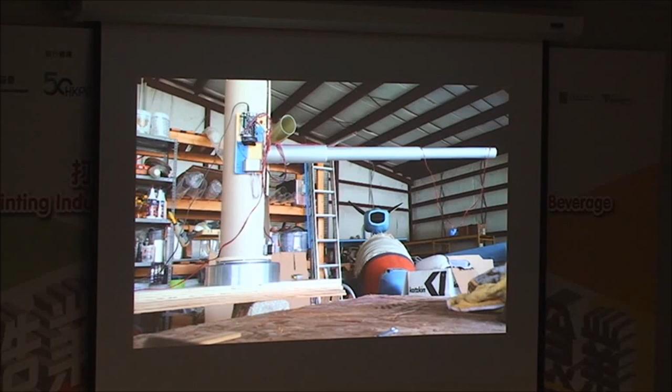And again, we're always imagining these as an endeavor towards architecture. And we're always looking back at traditions as well. So we're wondering how we might scale this up in other ways rather than components. And so more recently, we began to endeavor into hardware itself. But the lessons that we've learned of attempting to make a machine larger than the object itself, we want to avoid. And so this is a 3D printer that we're developing that is a polar 3D printer that can print an entire room, and then the printer can be pulled out of the room to print another room.

So this is under development now, but also we're beginning to explore how we can extrude clay to produce ceramic rooms in very traditional ways. But right now this is a manual 3D printer.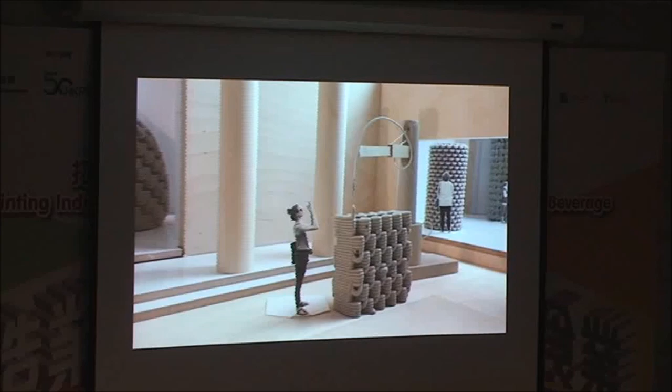But we're imagining how we can produce much larger objects, much larger components made out of fired ceramic, potentially producing entire spaces or forms. So whereas we're looking back, we're also looking forward.

And in this case, we see this house in Cameroon where the surface looks very decorative and ornamental, but in fact, each of those surfaces, let me go back a second. Each of those surfaces is actually a scaffolding built into the surface so that people can re-plaster the building every few years with mud. So we're wondering if this technology has the capability to impart beauty and form and structure into the 3D printing of architecture.

So I mentioned that some of those material studies were gradients between grape skin and cement. So the last material I want to talk about is cement. And I mentioned up front that many of the experiments in 3D printing and architecture have to do with creating concrete and extruding wet material, which we find to be very problematic. But again, we're looking not at structure, we're looking at all the other surfaces of architecture, the interiors, the facades, ceilings, and walls. And so we've developed a material made out of Portland cement that can create very complex and refined structures without the use of any formwork.

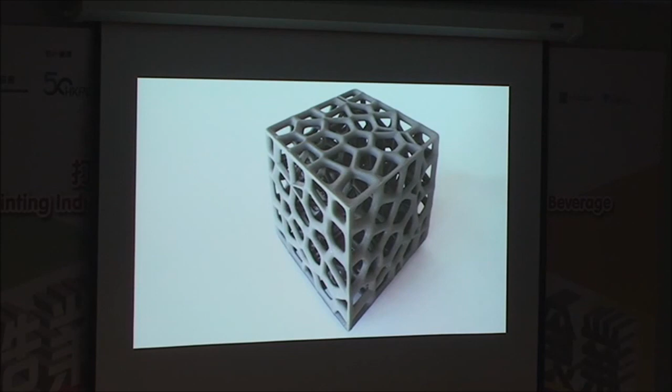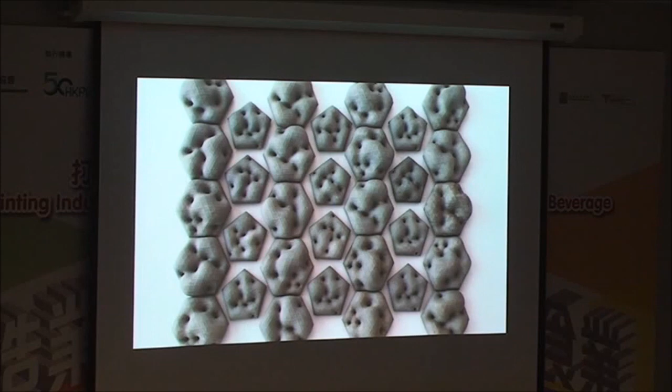But our 3D printed cement is very precise, it has translucent qualities, and it looks like concrete. But the difference is, it's also extremely lightweight. So this object, which is about 5 feet across, is a prototype that can be held together with paper clips. So you can imagine how that can be used in wall construction as a surfacing. So we can make very complex components, and we can deploy those complex components to create complex objects quite quickly.

As in the case of a bench we designed, a seating area we designed at the edge of the pier in San Francisco, that was inspired by the sea slug, which was discovered off the coast of California. So we called ours the sea slug. Again, we always look back at traditional ways of making. This is called a Truchet tile, which again can be randomly rotated. So we're really only designing one tile, and we're allowing the computer to randomly rotate it so we can create very complex patterning that never repeats itself. So a way to think about design that doesn't bog down the production.

And that's extremely important in 3D printing, because what we've discovered is that when we have a farm of 100 printers, we don't want those printers not printing. We want them printing all the time, and design can actually be a bottleneck. If we have to sit and design every unique object that we're going to take to the printer, that will take forever. So we have to increase our design speeds as well.

And so this is a process where we can create the design of a bench. We can tell the computer, these are the limitations of the size of the machine, and this is the thickness we need for the structure. And we can deploy that block on this surface, and we can 3D print all those blocks quite quickly. And here they are, cured, being assembled. And this is the final bench that we call the sea slug.

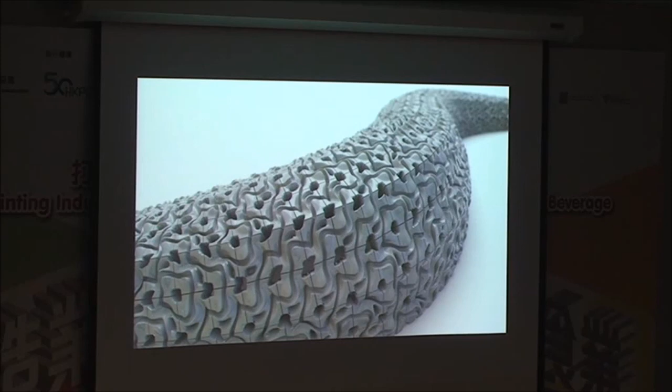So as I mentioned up front, architects use 3D printers in this way right now, which is to 3D print objects and models to evaluate the form and the space and to make decisions about how they might scale up at one-to-one. But what we're doing now with these material advancements is we're able to very quickly move from using the technology to evaluate and use that same exact file to make the actual structure.

This project we call Bloom. It's made out of 3D printed iron oxide free cement. It's comprised of 840 unique parts that are assembled individually into 16 larger building components.

And again, we're looking at ways that we can increase our productivity in design. So we developed a strategy where we can design using images, and the black and white of the image would tell the surface whether to open or close. So we can create figural patterns like this that have really beautiful effects.

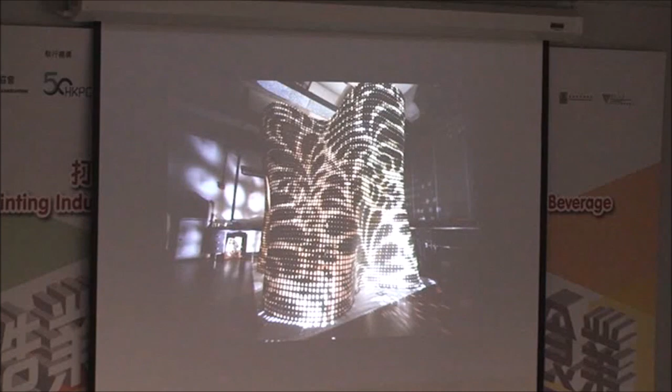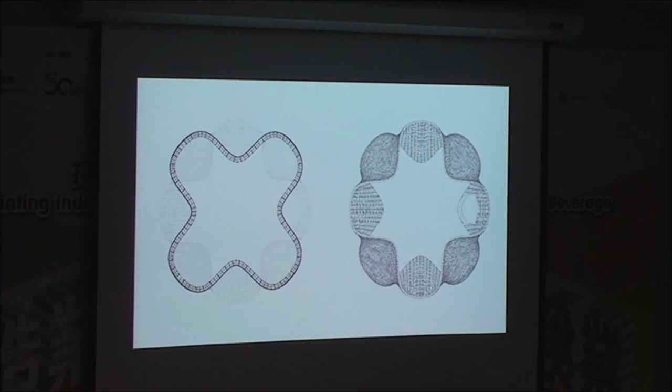You can see the blocks 3D printed in the assembly of the structure in our lab. And the structure is quite simple. It's a rotated plus sign, and that curvature gives it rigidity. So the plan is this way, and the top is this way. The bottom is about 6 inches thick, and the top is about 1.5 inches.

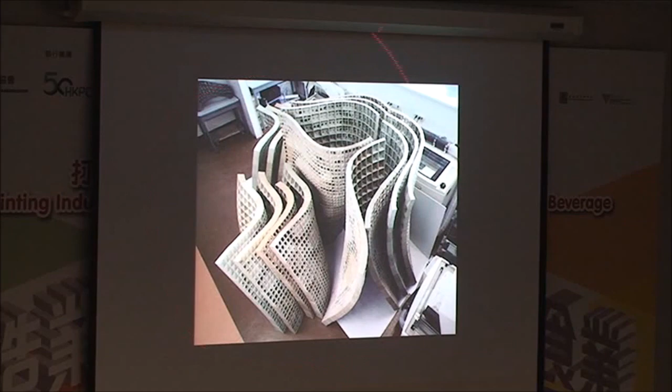We did the structural analysis in the computer, and it was assembled quite rapidly. We see the structural ribs inside, and we see the old brutalist concrete building, the new 3D printed concrete below. These are the 16 panels that it was broken down into, because after we constructed it, it had to be shipped to the company who sponsored it in Thailand quite quickly. And so here it is in our lab, then dismantled and reconstructed.

I'll show you a video of this being assembled. So you can see each of these 16 panels is quite easy to transport and carry. And so just a couple of people can actually hold one of those panels and put it in place. The material itself has a compressive strength of 4,700 psi, which is actually stronger than typical concrete. I'll let the video run so you can see not only the party, but you can see its dismantling.

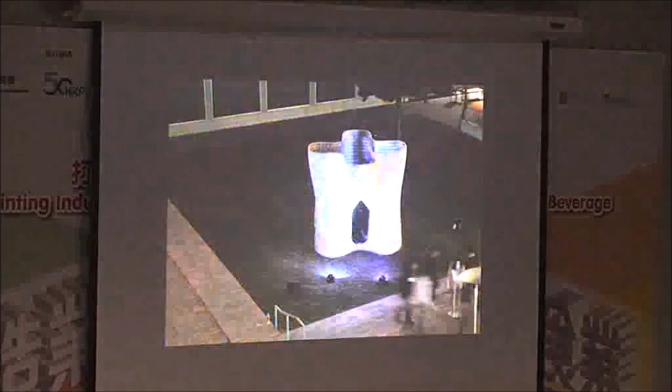So again, we're often looking back at tradition, and someone mentioned to me that this looks very much like these traditional houses in Ghana. And what I think is exciting about moving forward in 3D printing and architecture is that if we think about the past and we think about the future, rather than seeing that as a spectrum of technology, with the past and tradition at one end and 3D printing at another, what we're trying to do is connect those two in really elegant and beautiful ways.

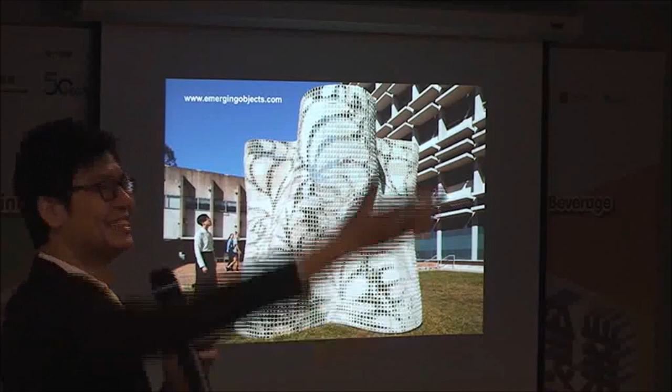Hello, Ronald. I just wonder, have you guys followed using recycled plastic as a material, like recycled bottles? Can you make them a powder form and print it? Yeah, I think the way to go with recycled plastic is an extrusion process, and most of what we've done is the ink jetting or binder jetting technology, and so moving into powder.

But we are now working with some partners at the University of California where I work, because we are becoming a zero waste campus by 2020, which means we'll produce no waste and we'll recycle everything in-house. So one of the things that we're doing is we're going to start sorting all of the various kinds of plastics and doing various things with them, and one of those things is converting into a 3D printable material. That's not going to be a very big part of this recycling endeavor, but it's going to be one of the things that we're working on.

Okay. And I saw many students in your PowerPoint. So did they contribute in the design, or are they just cheap labor? Yeah, cheap labor. They're actually not that cheap. They have to pay a lot of money. School fees, yeah. No, in fact, these are all research assistants that work in our lab, and we pay them quite well.

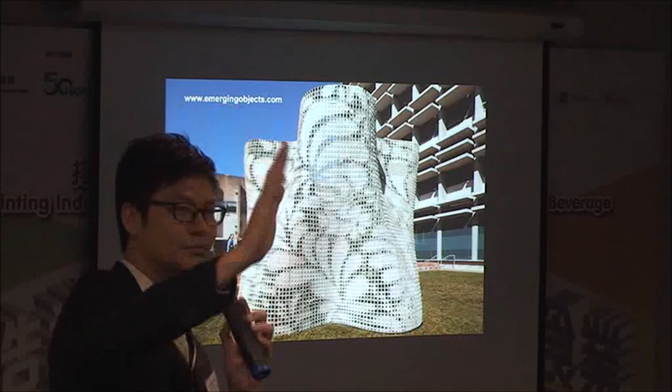I don't have any question, but I just want to make a very good compliment on your project. I'm an architect, so I've seen a lot of architecture applications in terms of 3D printing, but you have the most variety of portfolio using different kinds of materials, and it's very, very meaningful. I've taught in AA and in different universities, and most of them are using very industrial printing techniques or robotics to create architecture pieces or installations without any sort of content.

They're just like sculpture pieces or furniture using high tech for printing, but you are actually using recycled materials, trying to solve problems in terms of architecture tessellations using low tech printing machines to develop these large scale architecture pieces, which I think is very amazing. I would like to collect this in my 3D print museum in Shanghai, and I would like to invite you to come give presentations to the Chinese audience in Asia. And thank you for your presentation.

Thank you. Appreciate that. And I'll just make a comment that I think is important, that many of the advancements in 3D printing and architecture are done by mechanical engineers. No offense to any mechanical engineers in the audience, but part of the dilemma is that mechanical engineers are very good at making machines, but not very good at making architecture. Whereas machines are very complex in terms of their componentry and assembly, buildings are not. They're not very complicated in terms of assembly, but they are culturally complex. And that cultural complexity relies on a material palette of difference, and also forms that one could respond to as a human. And so this is our perspective in developing this technology. Thanks.